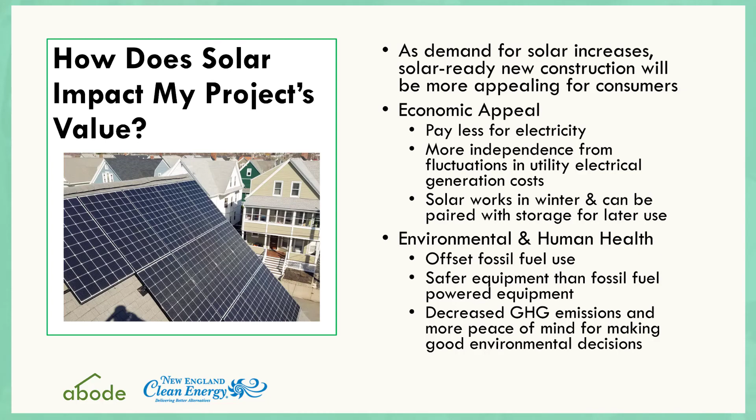The major driver for people going solar is the economics, with the environmental being a secondary import now. Another aspect is that customers feel a little bit of independence from their utilities.

Anybody got any love here for National Grid or Eversource? You love National Grid and Eversource? Do you work for them? Yeah, okay, right. Maybe you want to leave.

No, I'm kidding. I actually live in a town with a municipal utility, Hudson Light and Power. The rules are very different there for how they do solar electric, and every municipal has their own different set of rules, but the investor-owned utilities are all regulated the same. So if you live in National Grid, Unitil, or Eversource, East or West, you're going to get treated pretty much the same. The rates vary a little bit, but the process and how you get a solar system installed, not that difficult. We are certainly experts in the paperwork process, and there is a fair chunk of paperwork that goes with putting a solar system in.

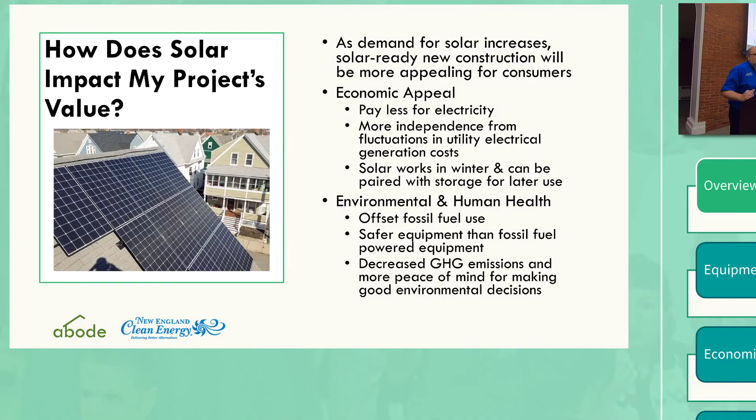So the environmental aspect, the human health aspect of solar, of course, you're offsetting fossil fuels. Fortunately, the market is killing coal for us, so we don't have to worry too much about coal. It's slowly going away. We still have a fair amount of oil generated electricity around here and natural gas. Of course, the less of that we use, the less greenhouse gases we put up into the atmosphere, the better our air, and the cooler our planet stays.

The houses are, for a large part, going electric. I'm seeing this more and more. Homes want to be either net zero or something very close to zero net energy, but the only way to do that is you have to be able to generate your own electricity on site. And the only current way to do that is, unless you have a nice stream in the backyard that you can do a hydro facility from, which not many of us have, is to put a solar electric system up.

For a while, I was in the small wind turbine business. That is not a backyard device, right? Wind turbines, A, there's not a lot of great sites for them, but B, the permitting and getting permission to put one in is pretty near impossible. I did 5 small wind turbines, and there was a zoning battle for almost every one, except for one I did on a farm, because farms have special, more loose zoning. So solar electric, on the other hand, very little zoning restrictions. You can put solar electric anywhere.

But if you're running your house with any sort of heat pump, whether it's a ground source heat pump or air source heat pump, that's all electric. And you're going to want some way to generate that electricity. The other thing you're going to see more of is batteries. Batteries serve a couple of purposes. The most obvious one here is emergency backup. Depending on where you live, that can be very valuable. And then, of course, electric vehicles are up and coming, and I would bet that 5 years from now, pretty much every one of us is going to be driving some form of an electric vehicle, whether it's a hybrid like a Prius or plug-in hybrid, or just a straight electric like a Tesla or something. So big demand for electricity.

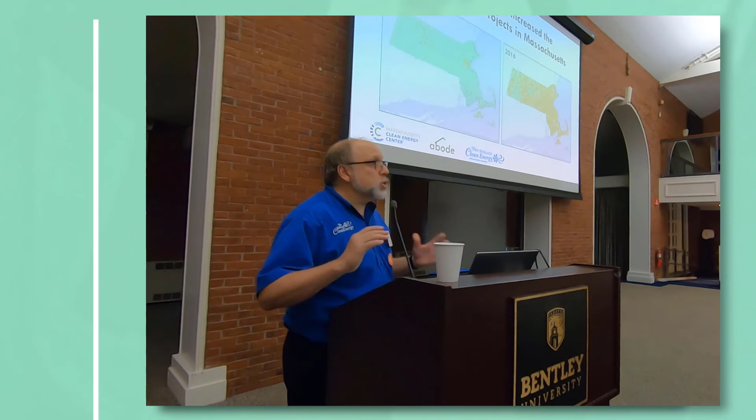You see there's 2 basic kinds of solar. You see what's called roof mount or behind the meter systems. Those are serving on-site load, right? That's what most homes do. You put a solar system on your roof to serve your on-site load. And then you see what I call merchant sites, where there's no on-site load, and those systems are designed to serve the grid and wherever that power is needed.

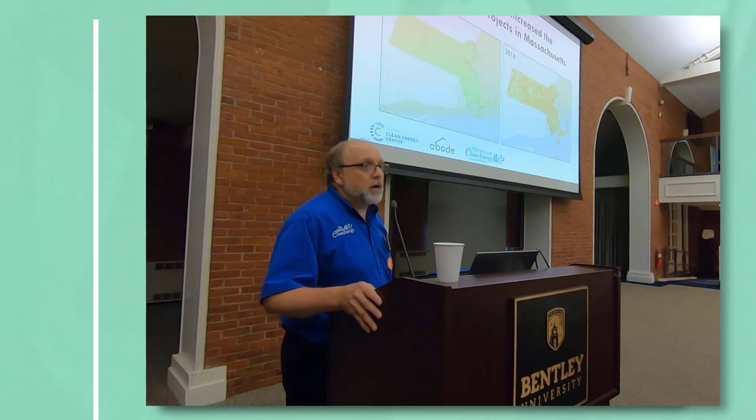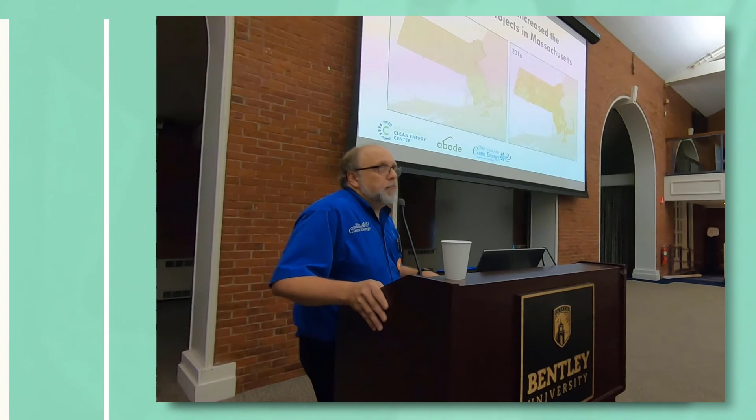We're seeing an explosion of merchant sites happening out in the central part of the state, northern Worcester County, southern Worcester County. That is creating some headaches for the utilities. Not my problem. I don't do merchant sites. I do all behind the meter solar. But the coolest thing about behind the meter solar is it really doesn't affect the grid. It doesn't put any demands on existing networks to speak of, maybe an occasional transformer upgrade, but it dramatically reduces what the grid needs to transport and helps the homeowner with the bottom line.

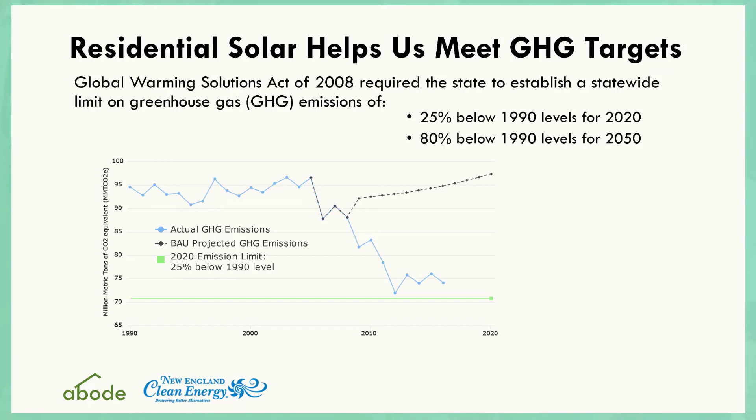Let's talk about greenhouse gas targets. The greenhouse gas emission targets were supposed to drop 25% by 2020 and 80% below 1990 levels by 2050. Frankly, the only way we're going to get there is through things like converting our fossil fuel generation to solar or other renewables.

Now, I talked a little bit about this. The cost of solar has dropped. They showed it about $4 a watt. The growth of solar has been exponential. It just makes sense. One of my coworkers is interesting. You know, we hear about these negative setbacks. There used to be a period when we ran out of rebates, back when they had rebates, and then when the SREC program existed and the SREC prices were dropping. These are the incentives that existed. And now we're into the SMART program, and in the SMART program, the incentives are stepped down in blocks. And he's fairly mellow about it, and he says, ultimately it will win.

And when you press him on that, he says, because the marginal cost of that next kilowatt hour is zero from the solar. Once you build that system, the next kilowatt hour is zero. It costs you nothing. As opposed to having to pull a train car of coal up to a boiler or a tanker of oil or pipe in gas. You have to keep feeding those beasts for them to keep generating electricity. And solar, we don't have to keep feeding it. So once it's built, it just keeps working. And the maintenance costs are noise compared to the fuel costs of a fossil fuel facility.

So yes, prices have dropped, $4 a watt. Realistically, you can do better than that if you do a bigger system. It's pretty amazing what's happened. The numbers actually work quite well. As I indicated in my introduction, we have prices dropping dramatically. The incentives have been in great support. As I said, we had rebates, then we went to the SREC program. We currently have the SMART program. And the SMART program pays the homeowner per kilowatt hour they generate. Depending on what your utility is, it's around 8 or 9 cents if you're National Grid, and I think it's around 12 or 13 cents if you're Eversource. It's hard to keep track because the numbers change a little bit.

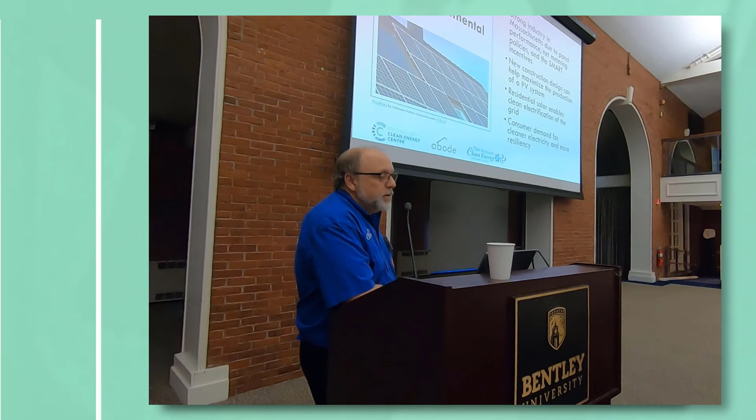When you build a house, if you build it the right way, you can maximize what you get out of the solar array. And of course, putting solar helps electrify the grid and supports people's demand for clean energy.

So let's talk about equipment a bit. First off, the systems are not hard. We put panels on the roof, sometimes on a ground mount. The panels generate DC, so we have to convert that DC over to AC. So you have something called an inverter or multiple inverters. There's either an inverter per panel or one inverter somewhere down in the basement or the garage.

The power feeds through to the main panel of the house after it's been inverted, and then from there it either flows to the house or it flows out to the grid. And there's a meter put on the side of the house called a net meter, and that net meter either does a forward or backward dance depending on which way current is flowing. The laws of physics say the electricity is going to flow to wherever the nearest voltage drop is. So if you turn on your dishwasher, that creates a voltage drop. That's where that electricity is going to go. You turn off your dishwasher and everything else in your house, you're not using any of your solar. Where does it go?

Because the voltage on the solar system is a tiny bit higher than what's out on the street, it pushes it back through to the street. Think of it as water in a pipe, and now your lowest pressure point coming in on the water is out at the street. But the meter counts it going backwards versus forwards.

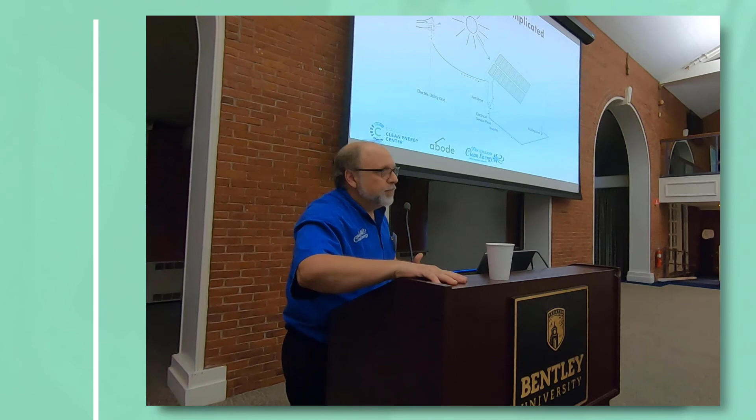Now, in the olden days, I love telling this story, people figured out that if you put in a meter upside down, it would count backwards. And so people, to save on their electric bill, would flip their meter over, and then before the meter reader would come out, they'd flip it back over, and the power companies started to figure this out and said, oh, wait a second, we're going to fix that.

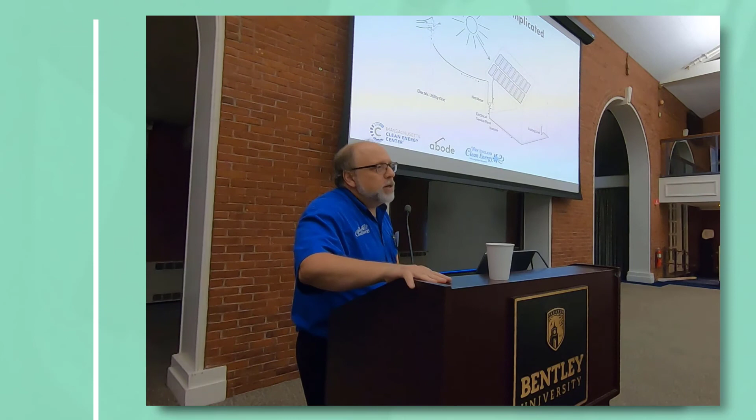So all current existing standard meters count up no matter which way electricity flows, and flipping the meter over isn't going to work for you. Interestingly enough, a net meter doesn't. It works like the old meter flipped upside down. Well, except that you'd have to flip it depending on which way your power flows. Fortunately, we have smart electronics that do all that for us now.

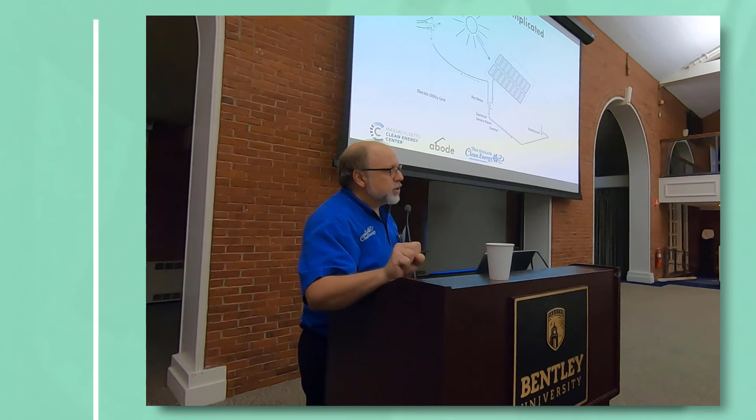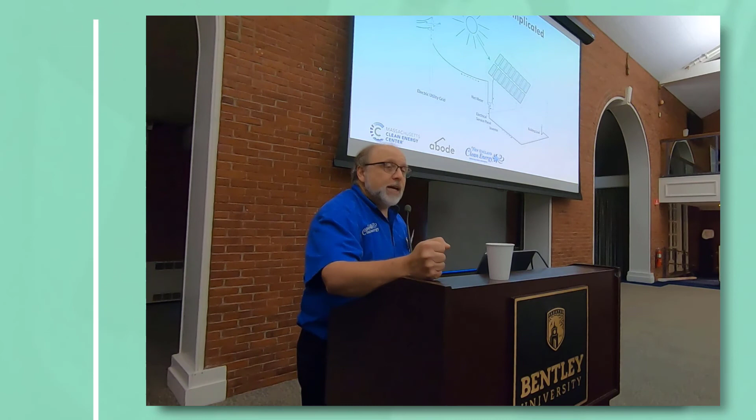I tell that story only because one of the most frustrating periods for a customer who's bought solar is the couple of weeks between the time we finish the system and the time the utility comes out and swaps the meter. They say, hey, why can't I turn on my system? It's ready, you guys are done, it was inspected, can I turn it on? No, because if you turn it on, any power you send out to the grid, you will get charged for.

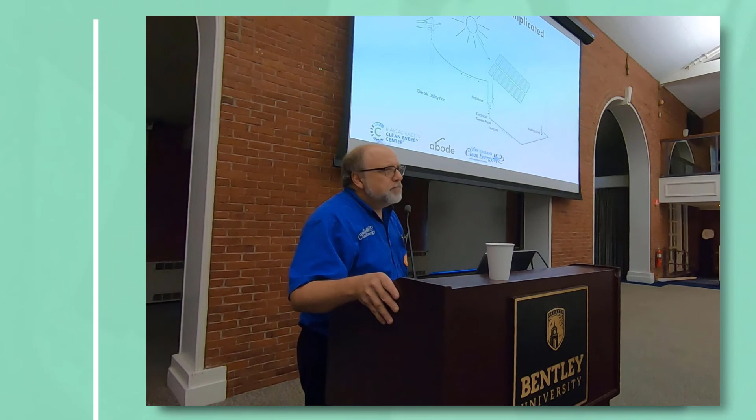So, if you ever deal with someone who wants solar, tell them be patient, wait for the power company to do that meter swap. I can't tell you how many phone calls I've taken because of that level of frustration. Okay. Solar panels, very well-known technology, been around a long time, very reliable, no moving parts.

I mean, there's just so much good about these things. They just don't fail. If you look at the things that fail on a solar array, solar panels are probably the least likely thing to fail. And if they fail, it's usually because they got broken by some other force, you know, a branch or a baseball or a soccer ball or something else.

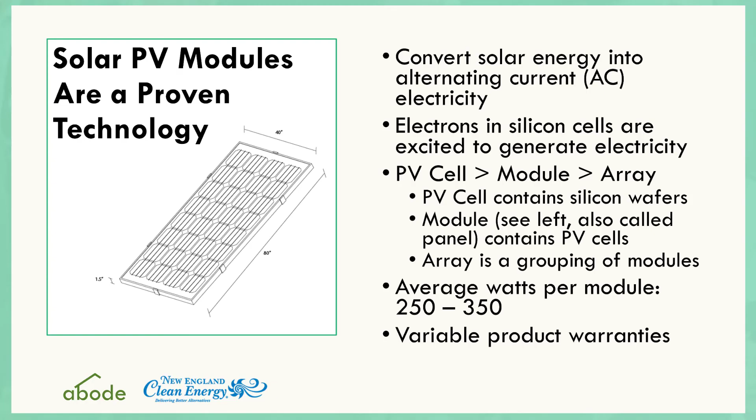Occasionally, and I have to say in 14 years, maybe I've replaced a dozen panels, you get some panel that expands and contracts and the glass breaks. The panel will still work, just not at quite as high output, and eventually water will start to get into that panel and destroy it. But they will function for quite a long time, even with broken glass. So there's silicon in there, the sunlight hits the silicon, gets the electrons moving, that generates the DC.

A typical panel nowadays, I would say the average panel wattage that we sell is somewhere around 340 watts. Our typical sort of Chinese module, 335, 325 watts. If you want an all-black version of that panel, it might be 350 watts. Our high-end panels, LG is now selling a 370. SunPower is selling a 400-watt panel. It's a little bit bigger than the 370.

That's one of the things that confuses people. They say, oh, he's selling a 400 and you're selling a 370. You have to look at the size of the panels, right? Because sometimes you can get 400 watts by making the panel a little bit bigger, but the power density on those panels might actually be the same. They might both be 20 watts per square foot. It's just the form factor means that the LG can only do 370, but the SunPower can do 400.

Point is, panels are getting bigger. My very first system, I said, were 200-watt panels. Those were high-end panels back then. The typical panel back then was about 170 watts. So the panel size has gone up about 60%, but the output has doubled. So we're seeing a pretty nice growth in how much a panel can produce.

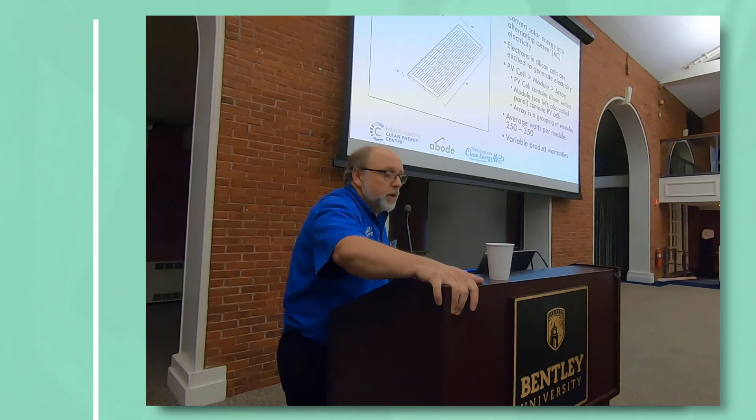Warranties: typically they have a 25-year power production warranty on a panel. Depending on the manufacturer, they may have a 12-year material warranty or a 25-year material warranty. And then the high-end companies, that's Panasonic, SunPower, and LG, also have a 25-year labor warranty. What that means is they pay the installer some money to go out and replace a failed panel.

The high-end warranties are phenomenal, but that sort of is evidence of how reliable these panels are. When LG says, yeah, we'll give you $450 to go out and replace a panel, and you never actually have to go out and replace a panel, it's sort of an empty warranty. But it's nice to know it's there, right?

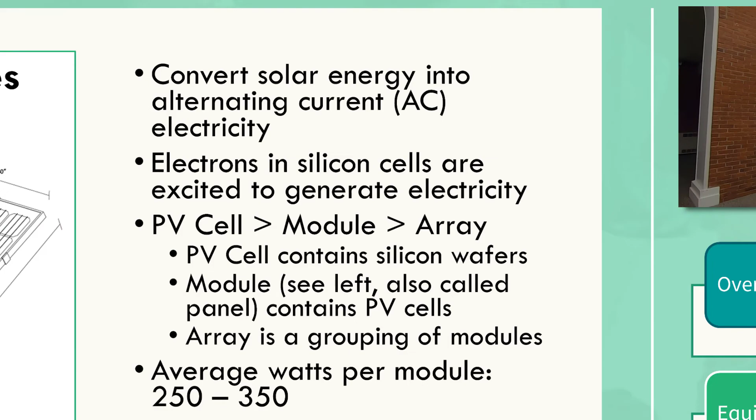The options, most common nowadays, are monocrystalline cells. Those are all black. There's also polycrystalline. You'll see those are blue, they're bluish colored cells. The efficiencies vary a tiny bit. The costs are very competitive. There was a time when poly was a lot cheaper than mono, but everybody likes mono better because it performs better under high temperature. And so we're seeing more and more panels with monocrystalline.

The panels are very low profile, so they're low to the roof, usually 3-4 inches. For a while, we used to do 6-inch pedestals. It helped the cooling, it prevented squirrels, but then we found that we weren't having much squirrel problems, so we've now gone to a lower pedestal. So the panels sit very close to the roof. The racking typically is all black. The frames and the panels are all black. So they largely disappear on the roof.

I was teasing the architect over here. When I first started the business, they were all about how they looked, about how panels were ugly. And my counter to that is, you get over how ugly they are when you get a zero electric bill. Suddenly the beauty of the electric bill far surpasses the ugliness of the solar panels. And that has been true.

I have panels on my house. I have a hip roof. It's a triangle, so my panels are staggered, and it's kind of funky looking. I don't even notice it anymore. I mean, I drive by it. If I do see it, I go, there are my solar panels, cool. I don't even think about it, right? And a lot of people do that. At first, they get all anxious about how it's gonna look, and then 3 months later, they've forgotten they're up there. So it's a neat evolution to see.

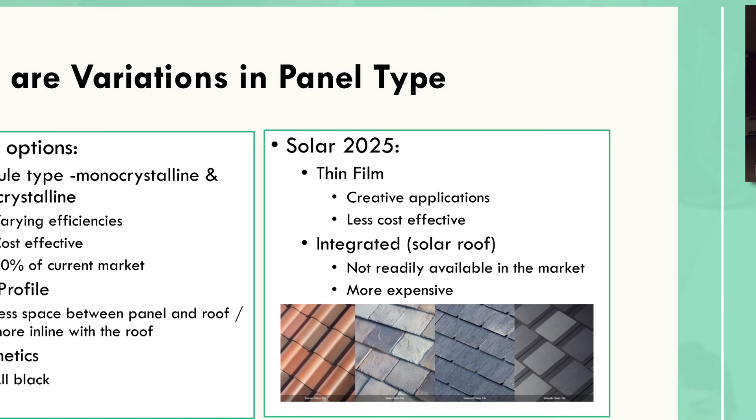All right. So other things, there's thin film solar. You don't see that on a roof. There was a period where they were trying it out. But what happened was the cost of regular polysilicon and monosilicon solar panels came down so dramatically that the economic prospect for thin film solar just sort of disappeared as a roof application. It wasn't as reliable. It wouldn't last as long.

Integrated solar, how many of you have heard of the Tesla roof? How many know there's about 12 Tesla roofs installed across the nation? Yeah, a lot of hype, not a product. There are a couple of other companies, however, that are doing integrated solar roofs. Dow has a product. I think they just sold it to Real Goods Solar. CertainTeed also has a product. They have approached me to offer it. Currently, I do not want to be in the roofing business, so I am not necessarily fond of it.

It's more expensive. And the other thing that's interesting about solar panels is as they get warm, they produce less electricity. That is part of the reason they are mounted 3 to 4 inches off the roof, to keep the heat from building up behind the cell and keep the panels running more efficiently. So these solar roofs will have a slow adoption. There will be houses where people are doing it because they can afford it and they just don't like the looks. But there are a lot of trade-offs to these integrated solar roof products.

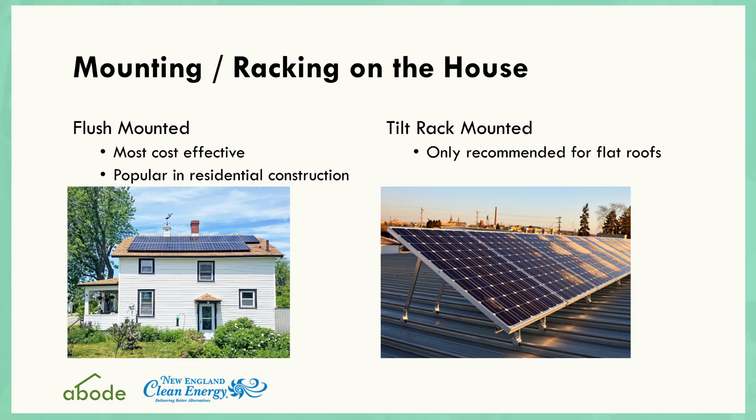Tilt rack mounting, that's a funky tilt rack. That's not a picture I would have used if I put this slide together. Most of the tilt racks now are ballasted systems on flat roofs. And ballasted systems generally don't create any penetrations, any holes in the roof. This happens to be a tilt rack where they've attached to what looks like standing seam metal roofs.

But typically, the costs and wind loads associated with tilting don't offset the benefits that you get from tilting them. At most, on a commercial flat roof nowadays, typical tilt is 5 degrees. That's a trade-off, right? You're giving up a little production. The ideal tilt might be 35 degrees, but at 5 degrees, you're not getting maximum production.

But because a panel is tilted at 35 degrees, it creates a huge amount of wind load, and therefore a huge amount of ballast is required, and most roofs can't handle that much ballast. You tilt the panels down to 5 degrees, you put an air deflector on the back, you use some ballast underneath the air deflector to hold the array down, much less ballast than you would use if the panels were tilted at 35. So you trade off some production to keep the roof whole.

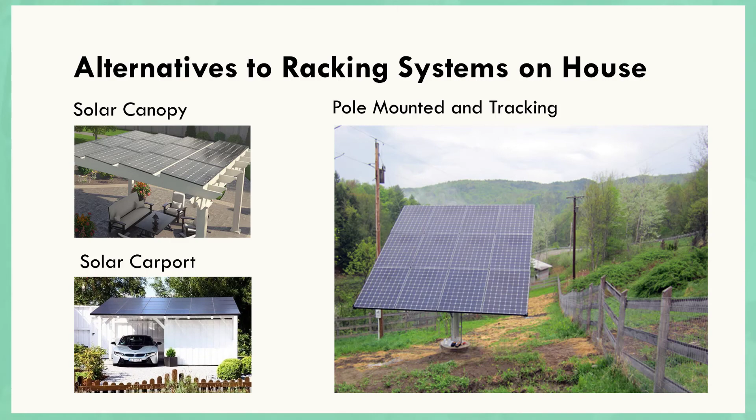You're seeing more canopies. Right now, most of the canopies you'll see are self-constructed. There are some companies out there that are starting to build canopies where I can go to a catalog and get a canopy for 5 kilowatts worth of solar. Same with carports. Largely, these are self-constructed. The pole mounts and other ground mount systems, and then there's trackers.

A tracking solar array is one where the panels actually follow the sun, both adjust pitch as well as azimuth. Pitch generally doesn't change during the day, but azimuth certainly follows the sun. The only downside to trackers is you really need to have a good open space so you can pick the sun up at 7 in the morning and follow it till 7 at night. Much of eastern New England, there aren't many spaces like that, so trackers aren't something you'll see here.

I have some friends in the business that live out in Greenfield, and they're the #1 trackers installer in Massachusetts. They've done 60 or 80 of them, but they live around a lot of farmland where there's lots of open fields, so those trackers can pick the sun up in the morning and follow it the whole day. So there are places for trackers.

I do a fair amount of ground mounts. Depends. I'll show you. There's some nice pictures here as we go forward about houses that don't lend themselves well to solar. That's when we go to a ground mount, or someone has open space and they really don't want to put it on their house, or they have a slate roof, or their house is in the shade, and so on, lots of reasons.

Inverters, as I said earlier, they convert the DC to AC. You can either have an inverter that does the whole array, or you can have one inverter per panel, a microinverter they call it. Very common, we've done both. I can't say I'm partial to one or the other. My installers like the microinverters because they seem to go in a little bit faster. But now you have a piece of electronics up on the roof.

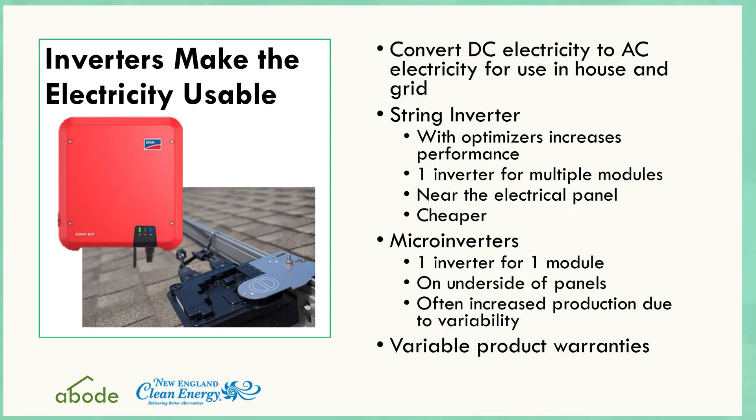At first, that was a thing that was, you know, oh my God, we got to put electronics on the roof. Well, the Massachusetts Electric Code changed fairly recently, and now every panel has to have some form of electronics on it in order to shut that panel down when the power gets shut off. It's something called rapid shutdown. So when we put a panel on the roof, if it's got a microinverter, it meets rapid shutdown. If it doesn't have microinverters, it has what's called an optimizer / rapid shutdown box. And so every panel has to have some form of shutdown built into it.

So when power gets shut off at the street, so if there's a fire at the house, the firemen either pull the meter or they cut the service to the house. That shuts down the solar array. But it also shuts down any DC coming off of the panel, so there are no live wires left once the power has been shut off to the building.

In older systems, if you shut off power to the street, you could conceivably still have live DC coming off the roof. Now, all DC goes in metal conduit, and a fireman is loath to cut into metal conduit, but there's still always a chance. So they really asked for this rapid shutdown feature. We've sort of moved into it without a blip because some of the manufacturers came along with some great products, and so that problem has been solved.

It has added a little bit of cost, a little bit of a headache, because as you know, electronics occasionally fail. Typically when electronics, like an inverter, fail, it's within the first year. We call it infant mortality in the electronic vernacular. Once you get a device that's going to run along, they'll run forever. Warranties on the microinverters and on the optimizers are 25 years.

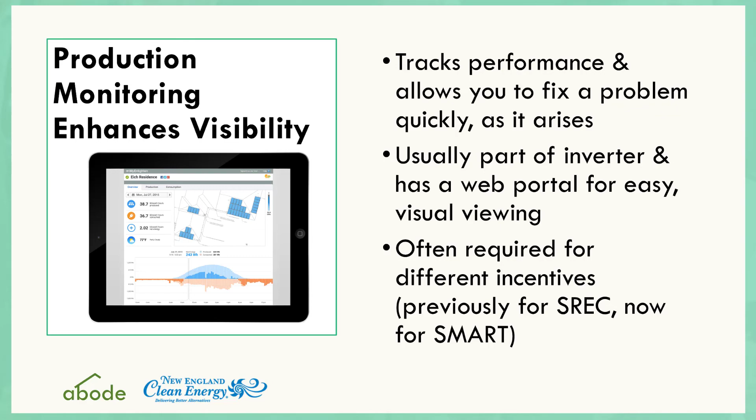Most houses, most of our systems have monitoring now. The nice thing about panel level electronics is you get panel level data. So you can see what's going on in a solar array at every panel. For example, I have Enphase microinverters on my house. And there was a period where they had a product that was having some issues. With Enphase, I could see every panel, and I saw 3 of my microinverters fail.

My company called Enphase, and they said, hey, we got this site. We think we have 3 microinverters that are failed. They go online, they look at it, they go, yep, we're sending you 3 warranty replacements. You'll have them in a week. And then the installer schedules and goes out and replaces my microinverters as part of the warranty service. So that's pretty common now.

Same thing with our other product, SolarEdge. When an optimizer fails, the manufacturer goes online and says, yep, you got a dead optimizer. They send us a replacement, and then we go out and do the repair. The monitoring also serves the data needs for payments for SRECs and SMART incentives. Remember I said the SMART payment pays you so many cents per kilowatt hour. Well, how many kilowatt hours did you generate? You get that off of the data system of your inverter.

The panel level data turns out to be really helpful for a homeowner or an installer like me. About 6 months ago, I got a call from a customer who had had his system in for 2 years. And he says, hey, Mark, one of my panels is really doing lousy. Can you take a look? So I pull up the monitoring, I look at his array, and I see one panel is like 40% of the rest of the array.

And I said, okay, let me look at some pictures from your site. And so I pull up a bunch of pictures, and sure enough, he's got a satellite dish right next to the panel, and it was casting a shadow, and it was dramatically reducing production. So I called him back, and I said, you want to move that satellite dish? And by the way, when you call DirecTV and they say it's $100 to move the dish, tell them that you want to cancel the service, and they will move the dish for free. There's your $100 I saved you today.

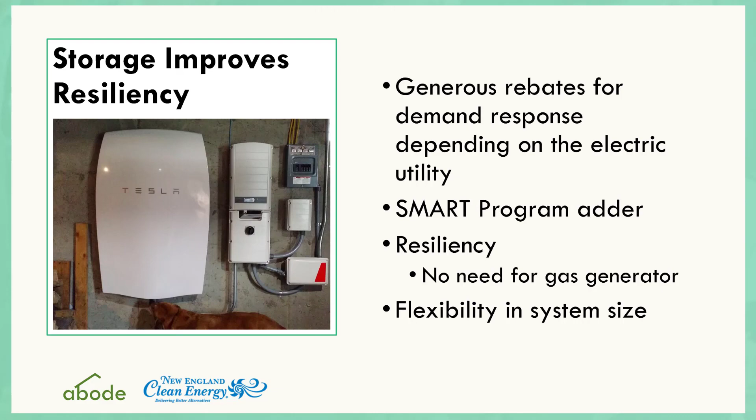There's also a demand response program where the utility can use your battery to help shave some peaks, like on one of those brutal July afternoons where it's 90% humidity and you don't want to go outside because you just start dripping wet. On those peak afternoons, they will take control of the battery and use it to supply electricity to the grid, and they pay you for those events. It's a few hundred dollars per event, and there's a half a dozen events a year. The program runs for 5 years, so if you put a battery system in, you could make a few thousand dollars. It doesn't cover the cost of the battery, but it makes it a lot less painful.

Batteries, of course, don't need any maintenance. You don't have to run them once a month to make sure they're working. You don't have to feed them with gas. And there's a lot of flexibility in the battery systems.

So literally yesterday, I was down on the Cape. I went to Harwich, because you all remember they had a little tornado a month and a half ago. I got a call from a guy. He has a solar system from a company that's now out of business, but he said, my generator did not start, and I don't want to put another generator in. So what can you do for me for a battery? So I'm going to put in a 15 kilowatt hour battery.

It won't serve the whole house, but it'll run his furnace, or his refrigerator, you know, some of the critical, what we call protected loads. So he'll be able to have heat, he'll be able to have cold food and some lights, maybe charge his phone, that sort of thing. And if he's careful about his loads, he can run on that 15 kilowatt hour battery quite some time, and then when the sun comes out, the sun's going to charge that battery for him, so he could live off grid if he had to for some time, provided he's careful about what he runs.

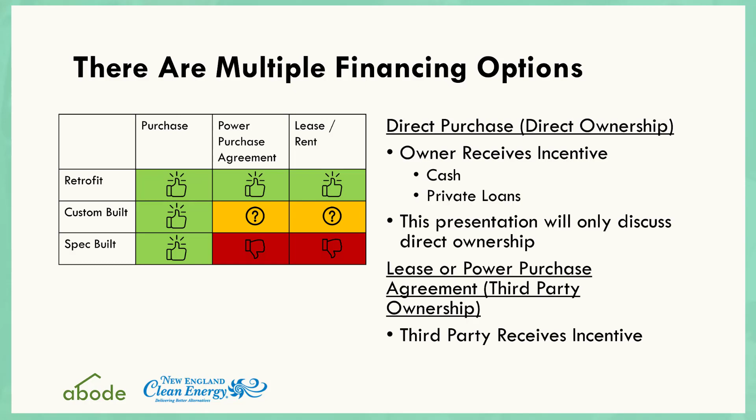There are a bunch of ways to own a system. My company only does purchase systems, so you can buy it with your cash or you can finance it through banks I work with. And that's pretty common. There's also leases and power purchase agreements. What is a lease or what is a power purchase agreement? They put the solar array on your roof. It belongs to them. They sell you the power off your roof at a discount compared to what you would pay your utility. So maybe if you're paying 23 cents with Eversource and you put a solar system on your roof with a PPA, they might charge you 16 cents or 17 cents. So you're saving a nickel or maybe a little bit more per kilowatt hour. For some people, that's the way to go.

I used to try to sell these third-party ownership programs, but I found that almost always the purchase it or finance it is a better financial investment. You don't see the immediate savings that you might see, but if you can use the tax benefits, then the tax credit makes a huge dent, and then you're way ahead by the end of just 5 or 7 years. Anybody here not paying taxes?

Yeah, so pretty much everybody can use the tax credit, but occasionally I run into someone who's retired on a fixed income and they have very low tax liability. In those cases, you can see a power purchase agreement working very well. The other place where power purchase agreements work is in the commercial space, and largely it's because these companies have limited capital and they don't necessarily want to spend it on solar.

I went to one client and talked to him about buying a system, and he says, look, I can buy a left-handed smoke shifter. I think he did big presses, stamping presses. He says, I can buy a stamping press for $300,000 and it'll pay for itself in 6 months. So I'm going to take my $300,000 or my line of credit or whatever and buy stamping presses before I'm going to spend $600,000 on solar that's going to take 4 years to pay for itself.

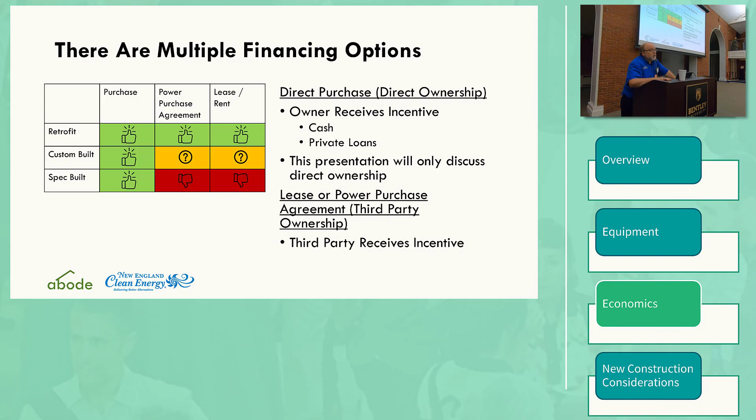In that case, I say, okay, well, how about a no capital commitment? You can put the system on your roof and we'll sell you the power at a discount. And so when you're a commercial establishment, owning the system may not be the best thing, and it's largely because of how they want to use their capital.

I have heard horror stories about getting free of the lease or getting the new homeowner to own the lease. I know that when you try to buy out a system, let's say you've lived in a house 3 or 4 years and you move, right? But it's got a leased system on the roof or a PPA system on the roof. The buyout price on that system is not going to be a depreciated price. It's going to be whatever the remaining value that system has to the owner of the system.

So if the system was 30 grand nominally when it was put in, and you run it for 3 years, and they get to take 3 years of SRECs, and they take their tax and all that stuff, that system might still be $25,000 to buy out. But for you to buy a brand new system might be 20 or less. So it can be an expensive way to get out of the system. So hopefully the new homeowner will assume the lease.

And that's where you start to run into challenges with leased systems, is that the new homeowners often don't want them for whatever reason. I mean, I think it's a good thing for the new homeowner even to take on the lease, but every buyer is different too. So some people are like, yeah, sure, I'll take it. Other people are like, should I take it? Any of you ever gone out on Reddit, go out on the solar thread, and you'll see people posting that question maybe once a week.

Hey, I'm about to buy a house and it's got a solar system on it. It's leased by SolarCity. Should I take it, right? Or should I force the homeowner to buy out the lease before I buy the house, right? The best deal is to get the homeowner to buy out the lease before you buy the house. But it's not necessarily a bad deal to take the house and assume the lease with SolarCity, provided you have the credit score and all that stuff. So I know that was clear as mud, wasn't it?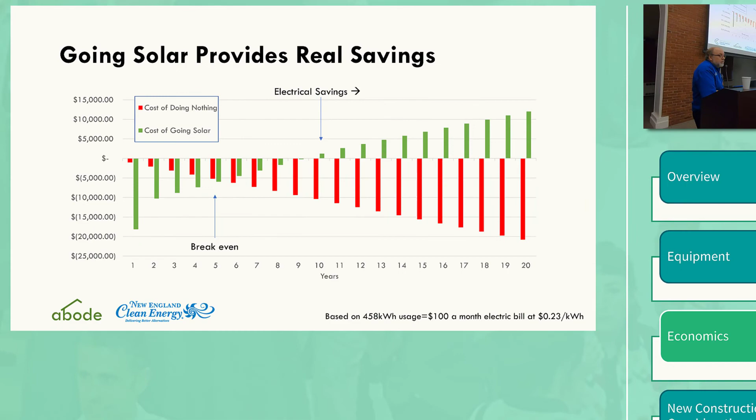Okay, this is a neat slide. I have a similar version of this in my typical proposal. It shows what happens if you do nothing versus what happens if you go solar. And of course, if you do nothing, you're just going to keep spending money for electricity. But if you put in a solar system, you're going to buy the solar system and spend some money on the system. This is like a finance system.

And somewhere out, I don't know, this one shows somewhere around 8 or 9 years, you've covered your cost and broken even. And then after that, it's just generating savings for you. Depending on when this incentive ends, you might be earning SMART before your loan is even paid off. You could earn SMART above and beyond your loan payments. So

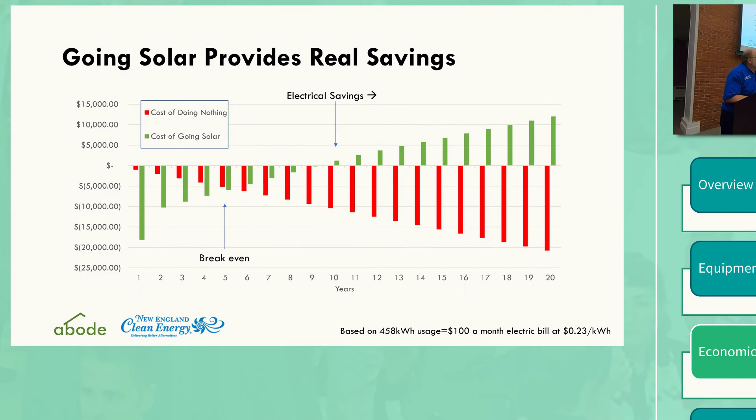Probably the number one question I get asked is, why isn't everybody doing this? And I can't answer that question. I don't know why everybody isn't doing this. It's very compelling. I mean, clearly, if you're only going to be in your house a couple of years, that's a good reason to not put solar on it. It's a big expense, right? But if you're going to be there 5, 6, 7, 10 years, it's an absolute no-brainer, unless your house is in the shade, right? And short of cutting down trees, there's not much we can do about that.

Every installer that's worth their salt, when they come out and do a proposal, they will give you numbers something like this. They'll show you what your monthly expense is before solar and what it is afterwards. More often than not, your monthly expense goes negative. In other words, you're making income even though you're paying the loan off on the system. And then the assumptions on this one are all down at the bottom.

Okay, if you bundle PV into a mortgage, I'm working with a builder, hint, hint. The builder said, hey, why would I do solar? What would I tell a homeowner? And I said, well, let's look at what happens if you add a $20,000 solar system to a house or a $40,000 solar system to the house, and then you finance that mortgage at 4% for 30 years. What is the net effect on the cost of the house?

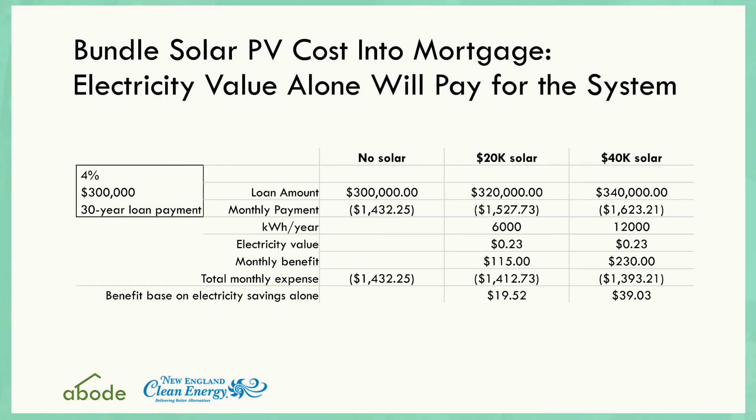New construction, you clearly want to work with your architect and your builder. There's some details about putting in solar, relatively easy to address, but you should address them beforehand. The number one disappointment for me on a new house is to find a vent pipe in the middle of a space where I want to put solar, right? And plumbers, any plumbers in the room? Good, they're lazy. They will put the vent pipe wherever it's convenient for them, right? They will not think about what's going on the roof. They don't even want to be on the roof most of the time. So you've got to talk to the plumber before he pokes his vent pipe through the roof, for example.

Of course, how you orient the house, what you put on the roof for dormers, all that stuff has to be discussed, and what's the style of the house, and we'll get into some of that. So before you do the installation, of course, you want to talk to the builder and the architect, the homeowner, the solar installer, so we can get the process going. As I said, there's a fair amount of paperwork, and the utility takes their time, not malicious, just big company kind of stuff.

In building a new house, there's sort of, in my mind, an optimal time to put the solar system on. The roof is up, the shingles are on, you haven't done any inside work except maybe started the electrical and the plumbing, but there's no drywall, no insulation. That is the best time to do a solar system because we can come through the roof with our conduit, and then we can run our conduit down to wherever the electric panel is going to be, and we're not having to deal with drywall, plaster, or any of that stuff. Right? So it just goes much faster when we can work in a raw house like that. Clearly, the roof has to be up, right?

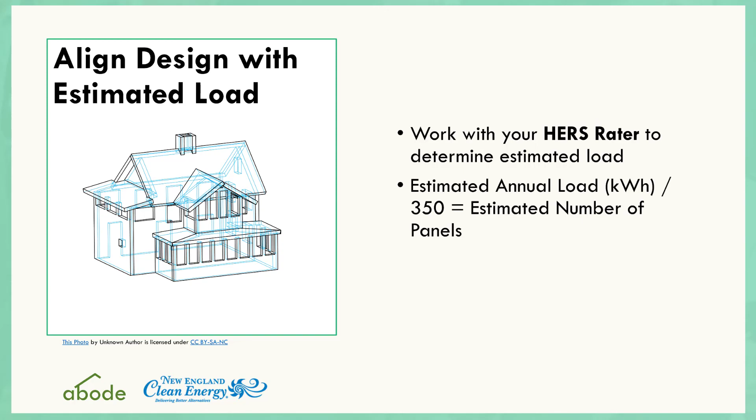Clearly, you want to work with a HERS rater. Any HERS raters in here? A couple of you, good. The HERS raters can estimate kilowatt-hour loads. I find they're pretty good at it too. The models are really sophisticated and have gotten better and better over time. I like this equation here where it says kilowatt-hours divided by 350 gives you an estimated number of panels. Obviously, that will change as panels get more efficient, but it's a pretty good number. 350, a good divider if you're quick and dirty, right? So.

We want to, of course, align the design with the load, right? If you think the house is going to use 10,000 kilowatt hours, as I said earlier, we generally design the system to meet the 10,000 kilowatt hour load, and that will vary based on panel and roof orientation and shading and so on and so forth.

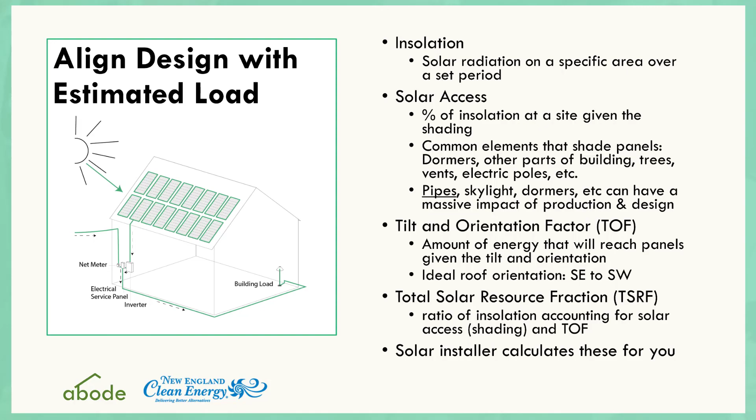This slide gets into a level of detail that most people don't care about, but they have tilt and orientation factor, the TSRFs. And I do all that math. I do the production estimates. I can tell you with a fair degree of certainty what a system's going to produce based on site shade readings, roof pitch, roof heading. We know. Right? The cool thing is from year to year, the amount of sun we get is pretty consistent. And so we can predict that fairly well.

One thing to highlight on here: in the design process, it's important to consider where your vent pipes are going to go and if dormers are going to provide shading. The installer or the solar sales company will do all these calculations for you. But in the design process, it's important to provide a roof that is as solar ready as possible. Let me give you some examples about that.

I'm working with a customer down in Rhode Island, and they're building a new house, and they said, Mark, here's our roof, how much can you fit on it? Well, one of the things I noticed was on the south side of the house, they had a beautiful south-facing roof, but right in the middle of that south-facing roof, on the edge of the house, was a fireplace with a chimney that went up about 10 feet on the south wall.

And I said, well, given that the south wall is already the warmest wall in a house, why would you put the fireplace on the south wall? Why don't you move the fireplace to the middle of the house? That will solve two problems. A, you'll get better heat for the house with the fireplace. It was actually a wood stove, not a fireplace. And you'll get rid of that chimney shadow going across the solar array.

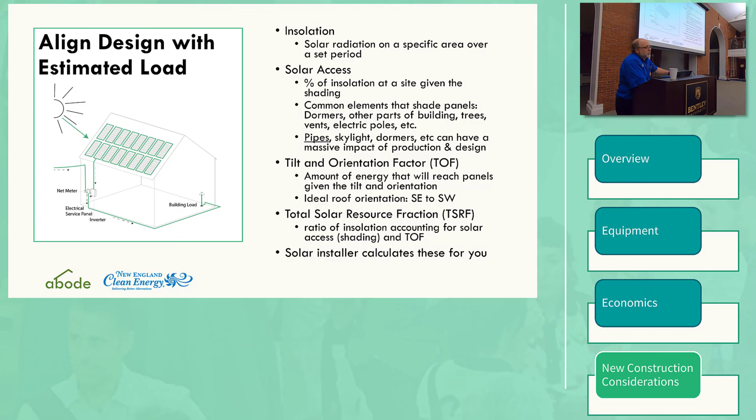I'm not sure of the rules, but I'm pretty sure that that's your branch. So, yeah, you can take that off. But I would still check with the neighbor and say, hey, this branch hanging over my driveway, it's scaring me. I want to take it down. I'm sure not much they can do about that. So let's see, did I cover everything on this?

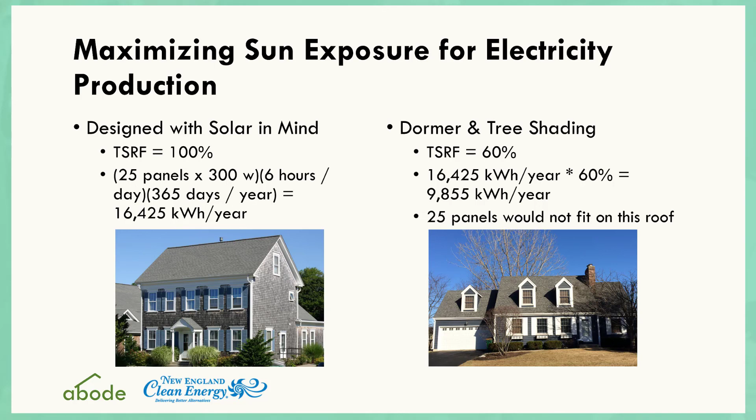Yeah, pretty much. Okay, so the house on the right, I call that house dormer hell. There's just nowhere to put solar on that roof because the dormers, while cute and make the house look very New Englandy, just chew up all the useful space. You could maybe put a row of panels along the peak, but that's about it. Down in between the dormers, they're going to be in the shade all the time, and they're just not going to perform. Not only that, it's going to look really funky. And not to say I haven't done this. I have done roofs where I have panels down between dormers. Yeah, the house on the left, beautiful. Not a thing on it, clear, wide open, going to do great.

All right. TSRFs of 100% are rare. So what is TSRF 100%? A 100% roof is one that's 37 degrees due south, azimuth 180, okay? In my 14 years of doing this, I've had 2 roofs that had a TSRF of 100%.

One of them was an accident. The house just happened to be built well. It was up on a hill, didn't have any trees around it. The other one was by an architect. She knew what the hell she was doing when she designed and built the house, right?

Don't trust a compass. A compass with magnetic declination will give you the wrong south. The smartphone compasses are nice because they correct for magnetic declination. I can't tell you how many houses I've looked at where they said, oh, my house is due south. No, your house is azimuth 165 because you trusted a compass, right?

So do find true south when you're looking for south, right? Use Google Earth or use the magnetic declination corrections that are built into your smartphone compass. And smartphone compasses are actually pretty good. So anyways, those two houses were 100%. Everybody else is less.

So an east and west facing roof can work. It's not ideal, but it can still be economically sound. So don't kill yourself if you can't orient the house perfectly south. Try to get it as much south as you can. Same thing with pitch. There's an optimal pitch depending on the azimuth, right? If you're east facing, it should be shallow. If you're south facing, it should be steep. And any solar installer can help you with that as well.

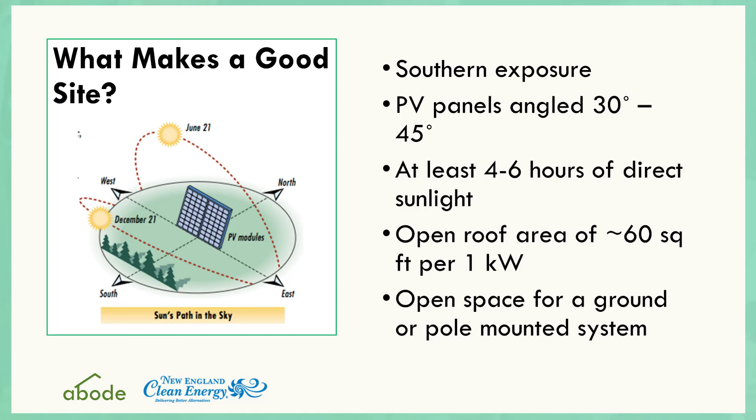And this slide sort of goes into, we like to see lots of sun, 4 to 6 hours, open roof area, or if you have room on the ground, room for a ground mount. A lot of installers don't do ground mounts. They can be a pain, but that's something that we're pretty good at. So, okay, structural load. We have snow loads, wind loads, orientation from structural elements, and then fire code. I already talked about the rapid shutdown.

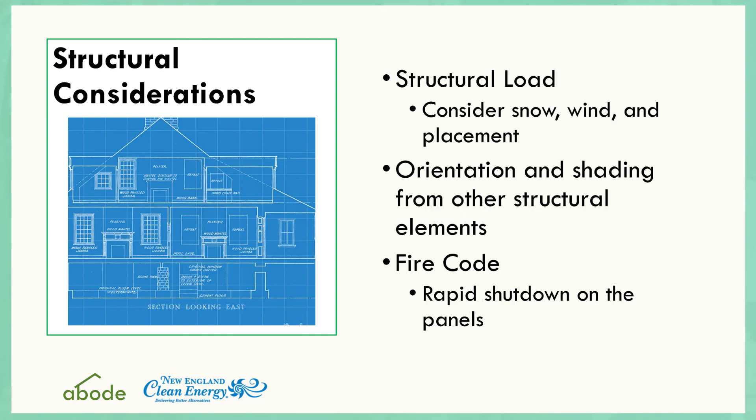A typical solar load is at most 2.5 pounds per square foot. That's including panel, racking, and any panel level electronics, right? You're doing typically 2 anchor points per panel on the roof. So 40 panels, figure about 80 anchor points. The point loads might be 20 pounds per point load, right?

So modern construction, if you're doing standard rafters, not trusses, then you're going to be fine most of the time, right? I tell you, we've run into these 1950s and 1960s ranches with 2x6s that are 19 feet long. That's going to be a problem, right? But who builds a 2x6 span now that's 19 feet? You wouldn't do that. It wouldn't meet code, right?

So you're using 2x8s or 2x12s or whatever it is. You're putting in a knee wall, you're sistering rafters, whatever. And that's what we do when we get to a roof that can't meet load. We have to either sister up the rafters or we have to put in some sort of a knee wall. Sometimes it's as simple as collar ties to keep the house from spreading when we add that extra load on the roof.

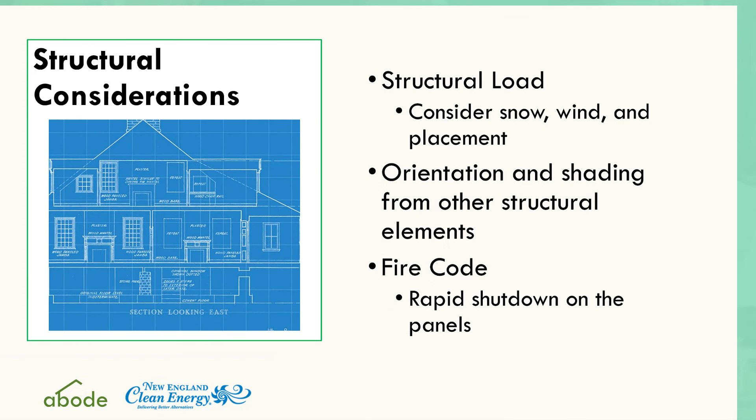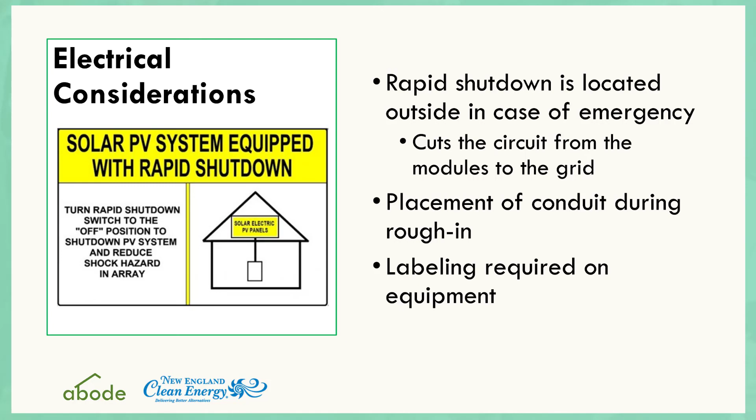Where was I? Okay, rapid shutdown, that's on each panel. When the solar array gets shut down, the panels shut down. That is Massachusetts Electric Code, Rhode Island Electric Code, I think all of New England is currently at that code. There are parts of the country that have not yet adopted that. But where I live, we just do rapid shutdown on every system.

Placement of conduit. The ideal is in the walls, through the roof, under the array, and then down through the walls and come out where the panel's going to be, if it's in the garage or in the basement or wherever. So we can hide all that stuff during construction. As I said earlier, the ideal time to put in a system is while the roof is up, but the walls aren't. And of course, we do all the labeling as part of the installation.

Solar does improve your HERS ratings. 3 to 4 points of improvement for a HERS score for a kilowatt of solar. And then when you get your HERS score below 50, that has some impact on the alternative energy certificates, which this young lady in the back of the room can answer questions about. So you want to talk to her about what that means. And you can get like 5 points from a 2.5 kilowatt system.

It's been a long time since I've done a system that small. 2.5 kilowatts is tiny. Our typical systems run between 8 and 10 kilowatts nowadays. When I started the business, it was really hard to get 10 kilowatts on a roof because the panels were so much bigger, or the power density was so much lower. Nowadays, I can do 10 kilowatts on pretty much any roof.

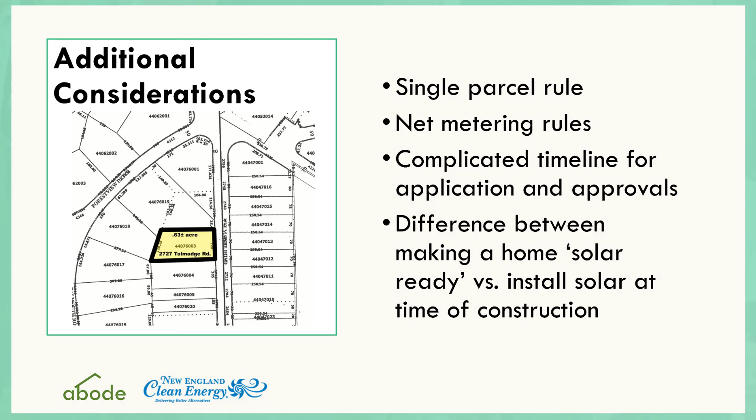So there's something called a single parcel rule. I am involved in a group that's trying to get this changed, but currently you're only allowed 1 net meter per parcel of land. So let's say you build a co-housing facility, and they all share 1 parcel of land, but everybody wants solar on their roof. Technically, you can't do it the way the rules are written right now. But the rule is inconsistently applied.

I've had National Grid sites where they've never even asked, and then I've had Eversource sites where they've been a pain about it, and Eversource sites where they don't even care. It's weird. We have several customers in a co-housing in Acton, and nearly every one of those houses has solar on it. Every one of them has a net meter, even though it's all 1 parcel of land.

But then I tried to do a 4th system for Mass Audubon in Lincoln at Drumlin Farms, and I went to put that 4th net meter on the site, and they said, nope, you're only allowed 1 net meter. And I'm like, but we already have 3 net meters on this site, and they started enforcing this new single parcel rule. It's a headache.

The rule was originally developed to keep the merchant site guys from splitting their solar arrays, these 5 megawatt arrays, into 2.5s to beat another regulation. And somehow that rule trickled down to affecting us little residential guys. So, I'm not sure if there's anything else I could say about this slide. Net metering rules.

Yeah, in National Grid, Eversource, Unitil, if your system is 10 kilowatts or below AC, then you get full net metering. That's if you're single phase, so 240 volt single phase. If you're 3 phase, so that's 208 or 480, then you can go up to 25 kilowatts and still get full net metering.

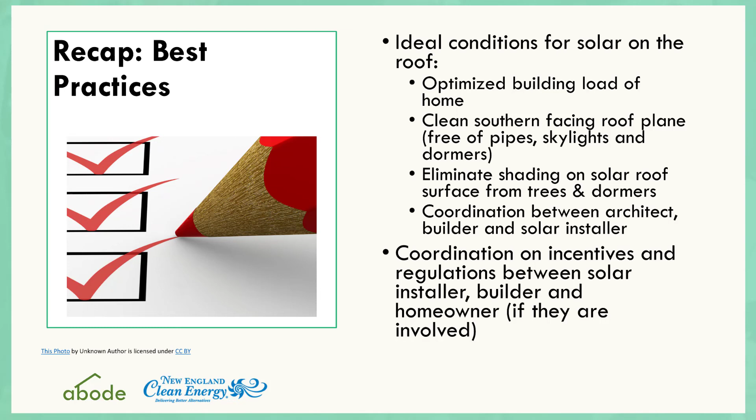So clean south-facing roof, coordinate between the architect and the builder. Massachusetts already has a provision in the building code called Solar Ready Roof. It's literally 3 paragraphs in the code. I recommend you read it. I could email you the chapter, but I don't have the actual reference.

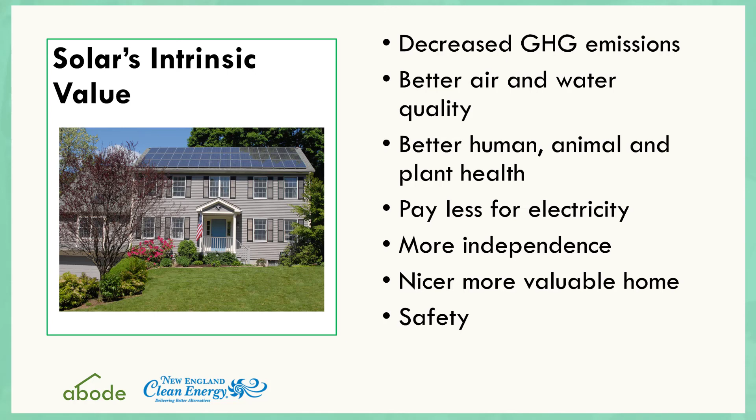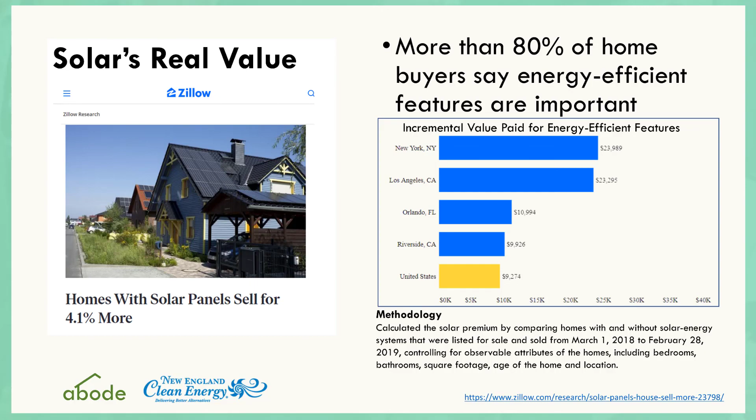Of course, what solar does is lower your greenhouse gas emissions, give us better air and water. Of course, plant health is all about it. You know, what solar is good for: pay less for electricity, some independence. There's a home value study that Zillow just published, and they say nationwide, homes with solar sell for about 4.1% more. Anecdotally, I have seen this, but I don't have the data like Zillow does.

And then that 4.1% number varies a bit depending on where you live, where your house is, right? I just ran the numbers for a customer where I pulled his Zestimate, and then I said, okay, let's take your Zestimate and add 4%, and the 4% of his Zestimate was about the cost of the solar system. And this is a house in Sudbury. So Sudbury houses tend to be a little bit pricier.

So it's like I can spend $30,000 or $40,000 on this system and have it go right into the value of the house. And that's not counting the electric savings. That's not counting the smart payment. It's not counting the planet friendliness and everything. It's where we need to go, guys. It's how we make our houses net zero and dramatically reduce the planet impact of homes and our living.

Peel and stick solar panels. I think they're going to have neat applications. I wouldn't put them on a roof, but I've been asked by customers about windows that were solar generating. Anybody here ever work on a Deck House? You're familiar with all that glass? They contacted me and said, it's time to replace our windows on the south side. Do you have an integrated product? I do not have a good integrated product, but a peel and stick might actually work for them. So I'd be curious to see what's out there, because I'd investigate it.

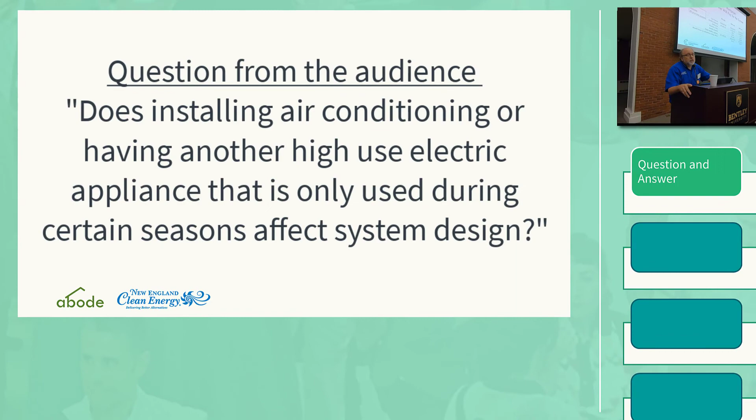No, that's a good question. So we generally size a system to match the load. I will take your last year's electric bill, and let's say your bill was 9,480 kilowatt hours over the last year. I'm going to try to design a system pretty close to that, plus or minus a few percent. Unless you tell me that you're going to buy an electric car in the fall, or you're switching over to mini split, so your load's going to go up. And therefore, you're going to use pretty much everything that you produce. And so your payback is based on assuming you use everything you produce.

One of the things to know about the investor-owned utilities is if you have excess production on your account, you will never get paid for it. Okay? So you generally don't want to overbuild the system. Now, there are ways for you to allocate excess. There's something called a Schedule Z, one of those paperwork hells that I deal with, and that says, take 20% of my excess and send it to my mother down the street, or to my sister across town, provided the other customer's in the same load zone, and load zones are really big, northeastern Massachusetts, southeastern Massachusetts. Provided they're in the same load zone, you can sell your excess to another account. So yes, but your break even assumes that you're going to use everything you produce.

I would recommend it. However, I have one customer right now with $3,000 worth of excess. He forgot or did his Schedule Z wrong or something. And there's no way for him to just blanket transfer all that excess to another account. He has to chip away at it. My advice to him was, get the electric car now, because you're going to charge it for free for $3,000 worth of electricity, or start heating your house with electricity and use up the excess that way. So if you oversize now, you're going to want to use some of that electricity until you have your electric car. So there's a little bit of balance. But I do recommend that you design for the future.